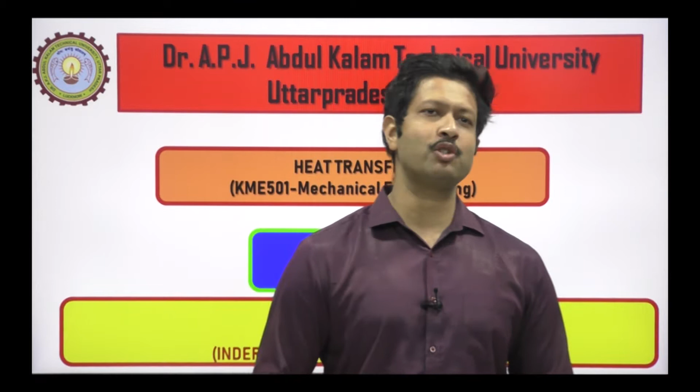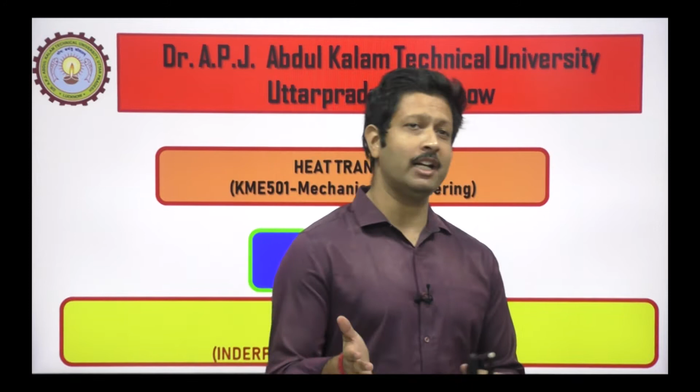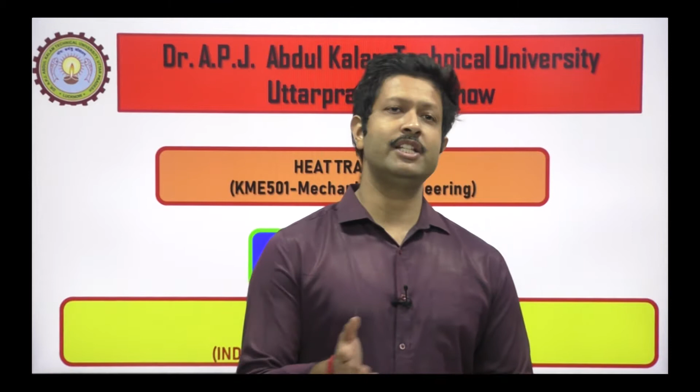Today I'm going to shoot a video regarding unit 2. As I told you in the previous video, we will cover two main topics. The first topic was fins, the extended surface, which I covered in the previous video. Now this video will be under the umbrella of transient heat transfer. Transient heat transfer has two basic topics: one is lumped parameter analysis, which is the analytical or mathematical portion, and the other is more graphical, a graphical method of solving problems. The checking parameter is different, so I will go through all the parameters.

So let's talk about unit 2, transient heat conduction. In transient conduction, temperature depends not only on position in the solid but also on time. Mathematically this can be written as T, the temperature, equals T of x, y, z, and tau, where tau is the time.

Typical examples of transient conduction are heat exchangers, boiler tubes, and cooling of IC engine cylinder heads. You might be thinking, what do you mean by transient heat conduction? Transient heat conduction is just the opposite of steady state conduction, which we already covered when deriving the conduction equations in various coordinates. Steady state conduction is conduction where heat doesn't change with time, but transient conduction does change with time. This is the most important thing you will ever solve, because in every practical application you will never find steady state conduction, since there are losses, and losses actually increase with time. So the value of heat either goes up or goes down depending on the application.

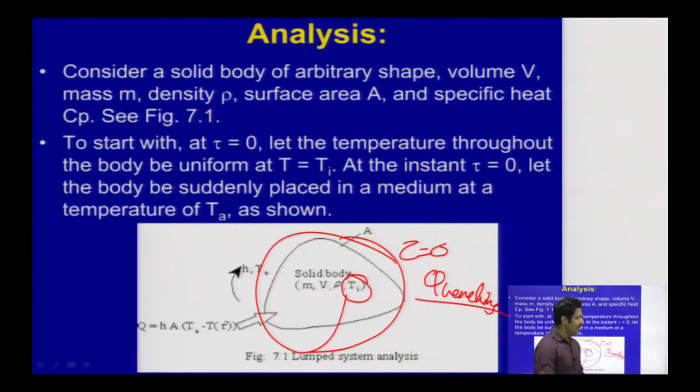It is Ta - suddenly it is being exposed to the ambient temperature, that is Ta, which is lesser than Ti, which is lesser than Ti.

Writing an energy balance for this situation: the amount of heat transferred into the body in interval d tau, where d tau means the time interval - the amount of time taken for the body to cool from temperature Ti to Ta.

So tau is the time - we are calculating the time for the reduction of temperature from Ti to Ta, or for that matter any temperature in between.

So the increase in internal energy of the body in time interval dt will be hA(Ta minus T) dt equals mCp dt. This is the change in internal energy, and this is the convection term, hA(Ta minus T).

Now since Ta is constant, we can rearrange and club terms like this, because Ta is constant. When we do this rearrangement we get this equation, and this is a very important equation for this particular topic.

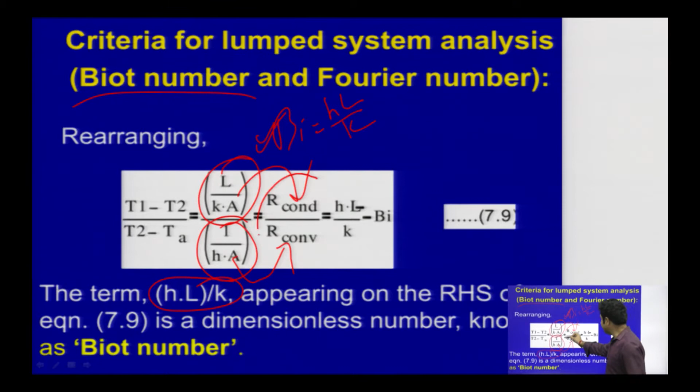This is the checking criteria for whether you will apply lumped analysis or Heisler's chart. So in any numerical, you first check the Biot's number. Its formula is HL by K, and it is the ratio of thermal resistance of conduction to thermal resistance of convection. If the Biot's number is lesser than 0.1, the temperature gradient in the solid is small, and temperature can be taken as a function of time only.

So this criteria is 0.1. Also note that for Biot's number greater than 0.1, the temperature drop across the solid is much larger than that across the convective layer at the surface.

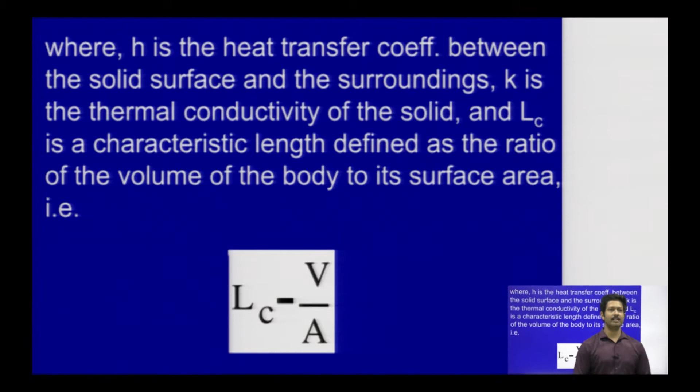Let us define Biot number in general as HLc by K, where Lc is the characteristic length, equal to volume upon area, since volume equals area into length. H is the heat transfer coefficient between the solid surface and surroundings, K is the thermal conductivity of the solid, and Lc is the characteristic length defined as the ratio of the volume of the body. So this equation can therefore be written as HL by K.

This can be written as HL by K into alpha tau by Lc square. This is the RHS, and the LHS remains the same. So now we can write it as the product of minus Biot's number into another dimensionless number, which is very important: Fourier's number.

Biot's number we have already seen, that is HLc by K, where Lc is the characteristic length, and the Fourier's number is alpha tau by Lc square. Alpha is the same as we saw in the previous video while deriving the 3D conduction equation - that is thermal diffusivity.

Now let us do a numerical. A steel ball, 5 centimeters diameter, initially at a uniform temperature of 450 degrees Celsius, is suddenly placed in an environment at 100 degrees Celsius. Heat transfer coefficient H between the steel ball and the fluid is 10 watts per meter square Kelvin. For steel, take these properties: Cp equals 0.46 kilojoules per kilogram Kelvin, density is 7800 kg per meter cube, thermal conductivity is 35 watts per meter Kelvin.

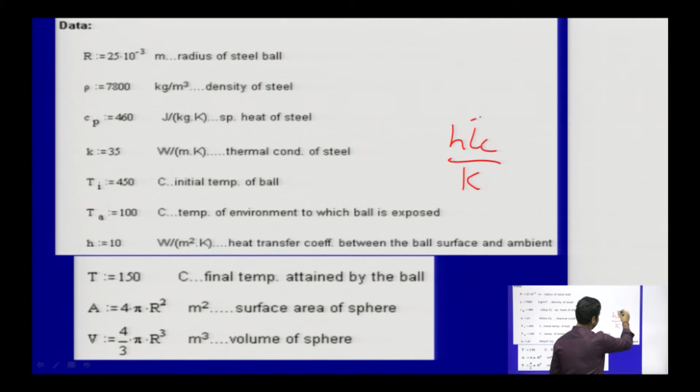Why are we doing this? Because we need to calculate Biot's number, and Biot's number has LC, that is HLC by K. This LC is characteristic length, which is volume upon area. So we need to calculate volume and we also need to calculate area.

Okay, so first calculate Biot's number, as I've already told you, this is the checking criteria, so you need to calculate the Biot's number first. You can see that this HLC by K is like H by K and volume upon area. So it is Biot's number.

So Biot's number, what you are getting is definitely lesser than 0.1 here. See, it is definitely lesser than 0.1. And since we have confirmed that the Biot's number is lesser than 0.1, that means we can now apply lumped system analysis.

Okay, this is, I'm again and again telling you, this is the first thing you need to solve until and unless it is stated in the numerical that you need to implement lumped system analysis.

And if it is not written there, then you need to first of all check the Biot's number, and if it is lesser than 0.1, go with lumped system analysis.

Okay, now we know the lumped system analysis formula. This is the lumped system analysis formula, that is T minus Ta by Ti minus Ta is equals to e to the power minus Ha tau by rho Cpv.

Everything is given here, so just calculate the time. See, rho is given, Cp is given, volume we have already calculated, H is given, A is given, everything is given. So just calculate.

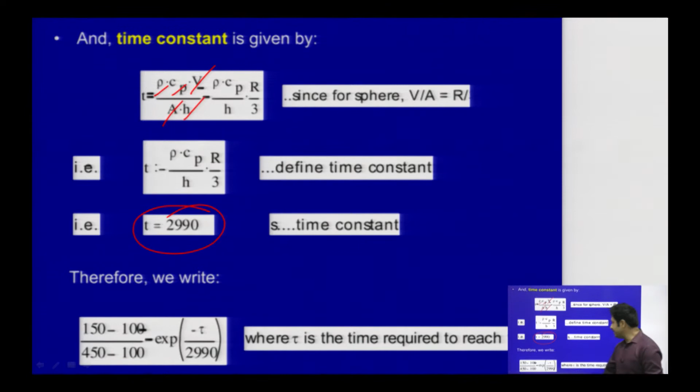So when you have calculated time, the time is 2990 seconds. Did you get this? So where tau is the time to reach. This is the time constant.

So what you need to do, see the time constant I have already told you, that is rho Cpv by Ha. Okay, so this is the time constant.

So since you have calculated this and we know that the unit is in second, so this is also in second. Now what we need to calculate, so put it here, 2990, you need to put it here. Now you need to calculate tau. So how will you do this?

See, everything is given: 150, 100, 450, 100, because we need to calculate time for reaching 150 degrees Celsius. So T of tau will be 150 degrees Celsius. See, T of tau, this is the temperature at any time.

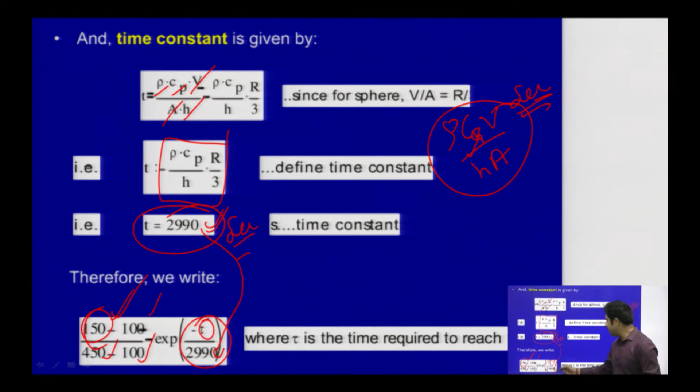So we need to calculate time for some temperature, and that temperature is 150 degrees Celsius. The ambient temperature is 100 degrees Celsius. The initial temperature of the body was 450 degrees Celsius, and again the ambient temperature is 100 degrees Celsius.

And you have already calculated the thermal time constant with this formula. Okay, so you need to calculate the time.

So see, this is the mathematical thing, and this is what is the time to reach 150 degrees Celsius. Okay, so if we do it in hours, you will get 1.6 hours.

It will take approximately more than 1.5 hours to reach, for that body, for that body having that particular dimension with that particular temperature limits.

It will take 1.6 hours to cool from 450 degrees Celsius to 150 degrees Celsius. So you can see that to reach from 450 to 100 degrees Celsius, it will take more than 1.6 hours.

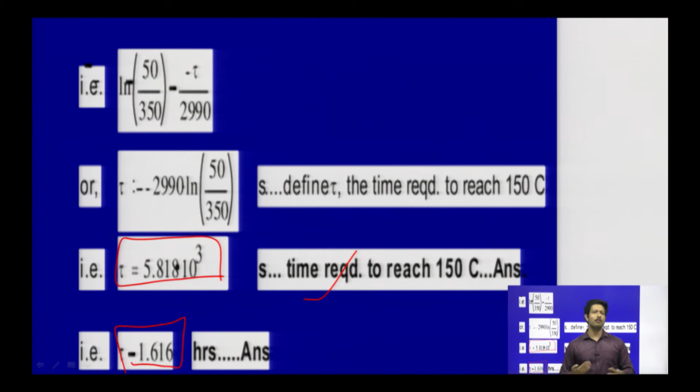So guys, what we have seen till now is actually the criteria for giving lumped parameter analysis. We have already seen that if the Biot's number is lesser than 0.1, only then we can implement the lumped parameter analysis.

Okay, so this is the first checking criteria. So as we have seen in this numerical.

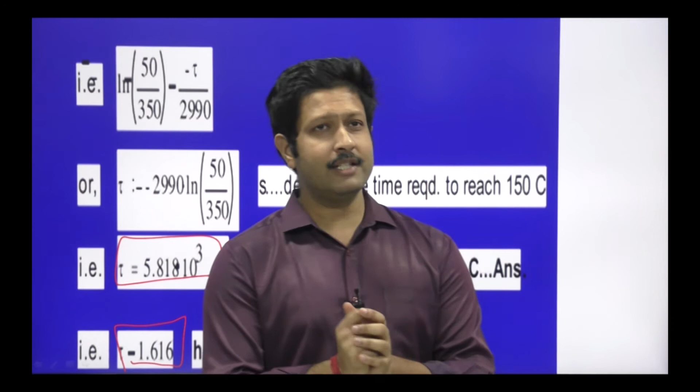That first of all we have checked the Biot's number. So for any given numerical, until and unless it is specified, I'm just repeating this once again, until and unless it is specified that the lumped parameter analysis has to be applied, the question will be framed in a different way.

Okay, so then the Biot's number will not be required to be implemented because it is already stated. But if it is not, then definitely you will be first calculating the Biot's number.

And then you will be checking the Biot's number, and if it is coming lesser than 0.1, as you can already see, lesser than 0.1, then definitely you can implement the lumped system analysis.

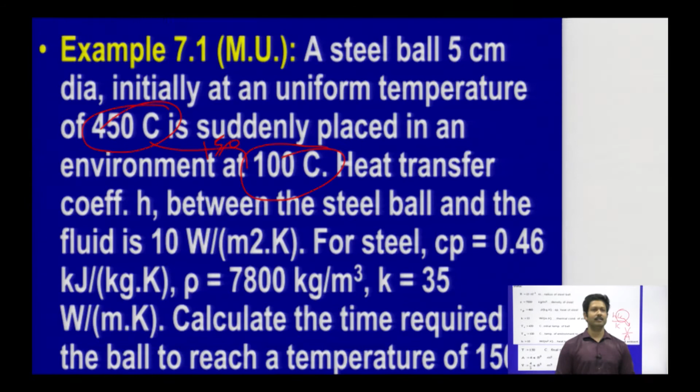Now let me tell you guys, suppose if we go back, this was all about theory. So let me just discuss something about the applications. Okay, now let us see this application.

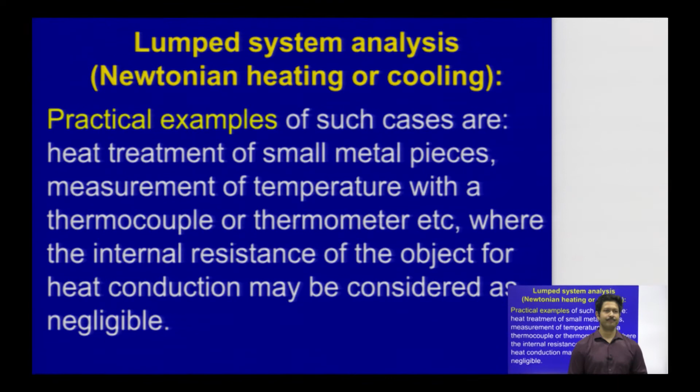I hope the theoretical, analytical portion is already clear, so I will be discussing the theory of heating and cooling of buildings. What does heating and cooling of buildings actually mean? Suppose if I draw a building here.

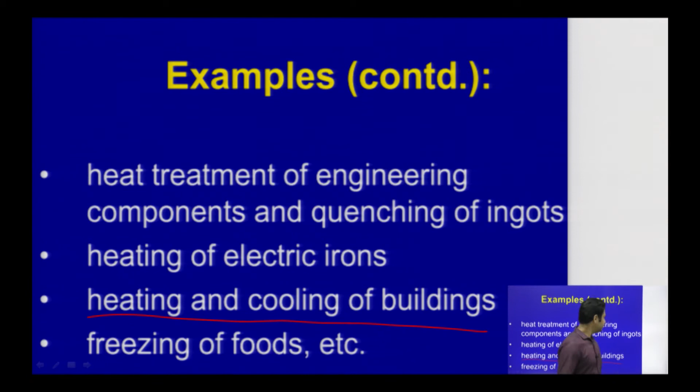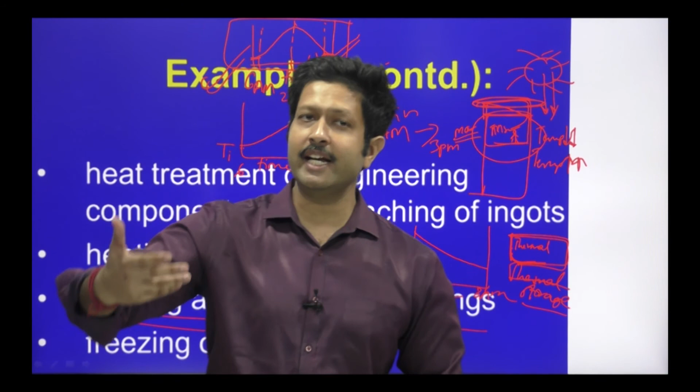Whereas this concrete and this brick wall is actually taking in the heat from the peak daytime and onwards. Then when the night temperatures are coming down, the concrete or brick has actually started releasing the heat inside the room.

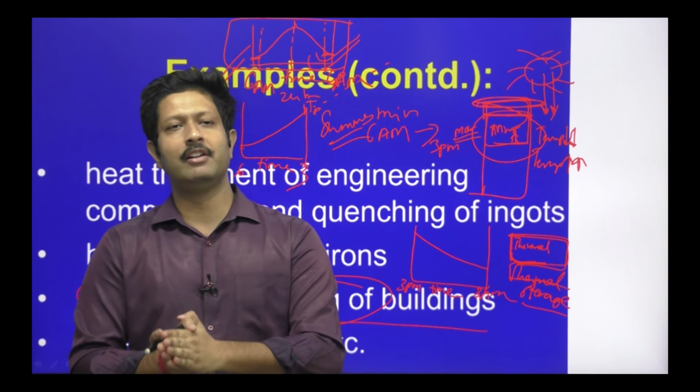So during the night time you feel miserable inside, while the night temperatures outside are settling at a comfortable level. Whereas in the daytime, when temperatures outside reach a miserable level, you are actually in a comfortable zone inside your room. So these two temperature profiles are actually contradicting each other.

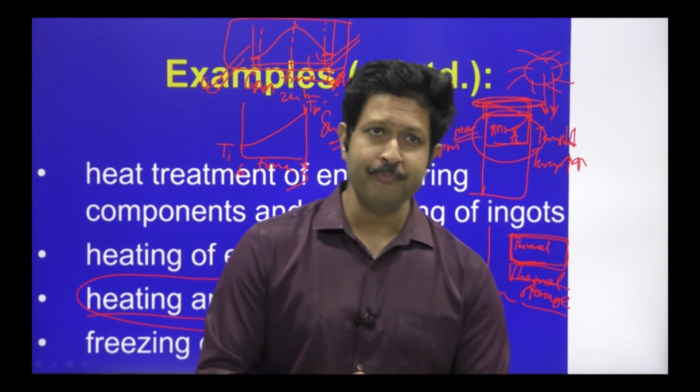This is a new concept you should know, and this is thermal storage. This is an additional thing I've told you in this topic, because if we did not discuss the concept of thermal storage, we would not be able to finish up this heating and cooling of buildings.

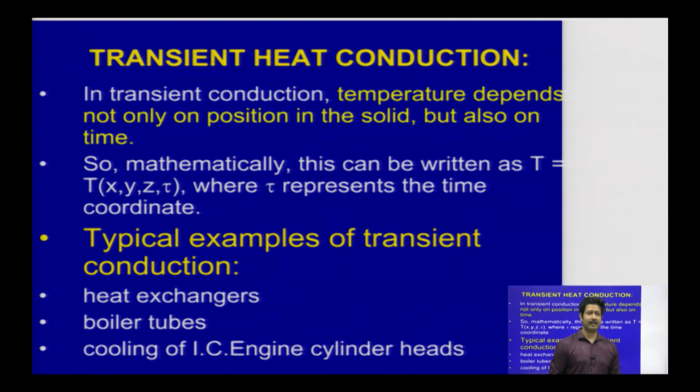This freezing of foods, heating of electric irons - you know the iron doesn't heat up instantly, it takes some time. Till now we have covered transient heat conduction, which depends on time, and all the examples I've told you are time dependent. Suppose if we take IC engines, they also take time to cool.

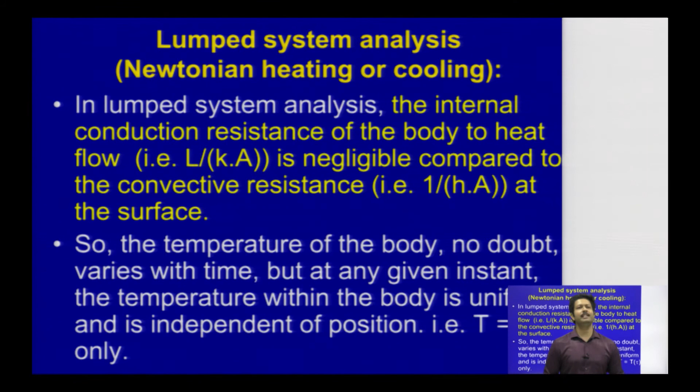So we have seen the lumped analysis, where the internal resistance is neglected, and we have done the analysis. We have also done the energy balance equation. We have seen HA by rho CPV.

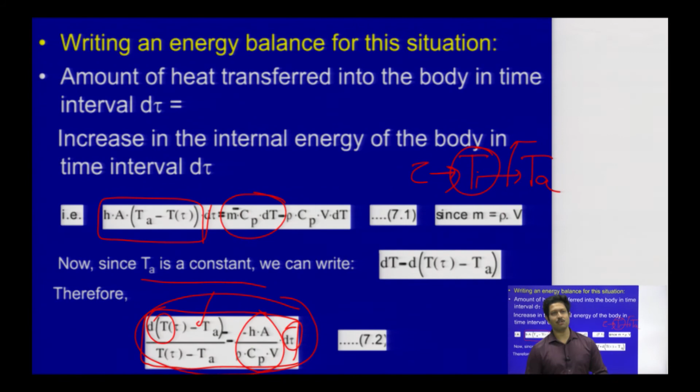This is a thermal time constant. We have derived it, I have written it like thermal time constant here. And then we have derived the Biot's number.

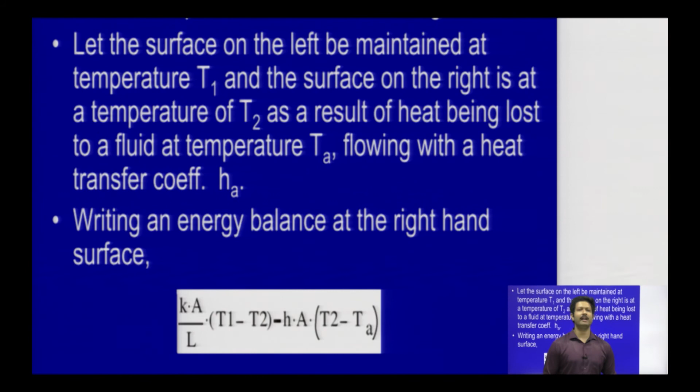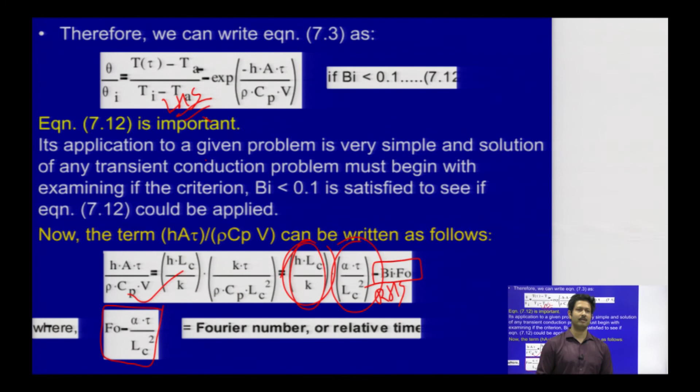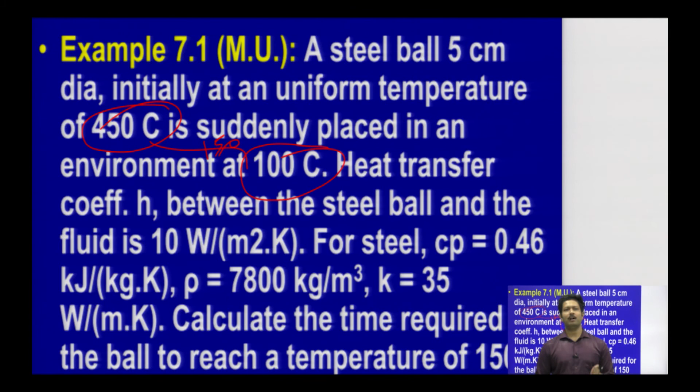Now we have seen a numerical, and we have calculated the time for 450 degrees to 100 degrees. We have calculated the time to reach from 450 to 150 degrees Celsius. This is the numerical that we have done.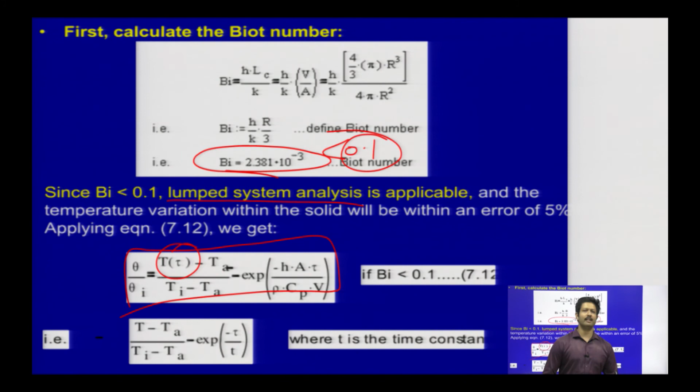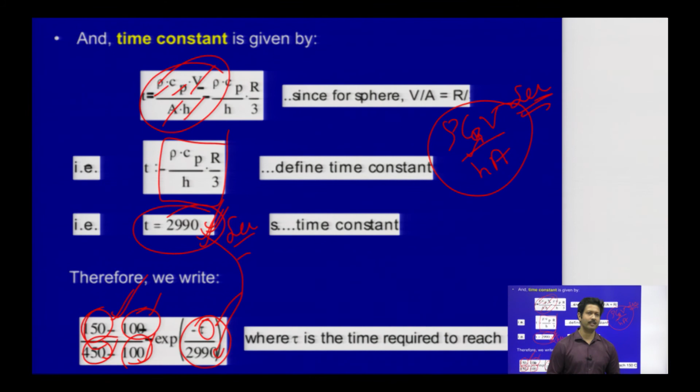We have checked the Biot's number, 0.1, then only we can confidently tell what kind of analysis to implement. Then the time constant we have calculated, and after the time constant we have calculated the actual time to reach 150 degrees Celsius. So this is the time we have calculated, 1.6 hours.

So this was all about the theory, this was all about the derivation, this was all about the numerical, and I have given you some extra thing that is very much important for your later life if you opt for a career in thermal engineering - that is thermal storage.

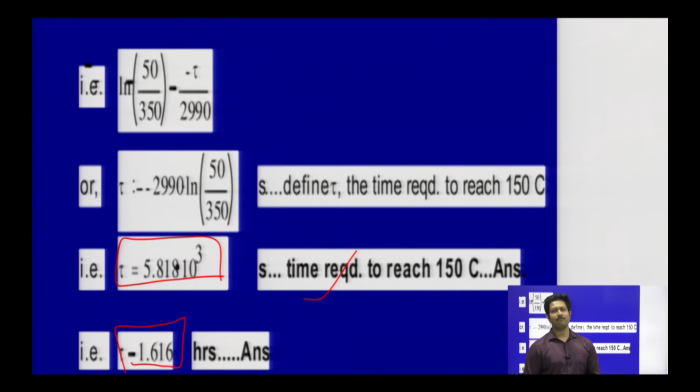I think this video was quite useful, quite exhaustive for this particular topic. I think this video would actually cater to solve this portion of unit 2, which is lumped parameter analysis - the theory, the derivation, the numerical, and the little tip about thermal storage.